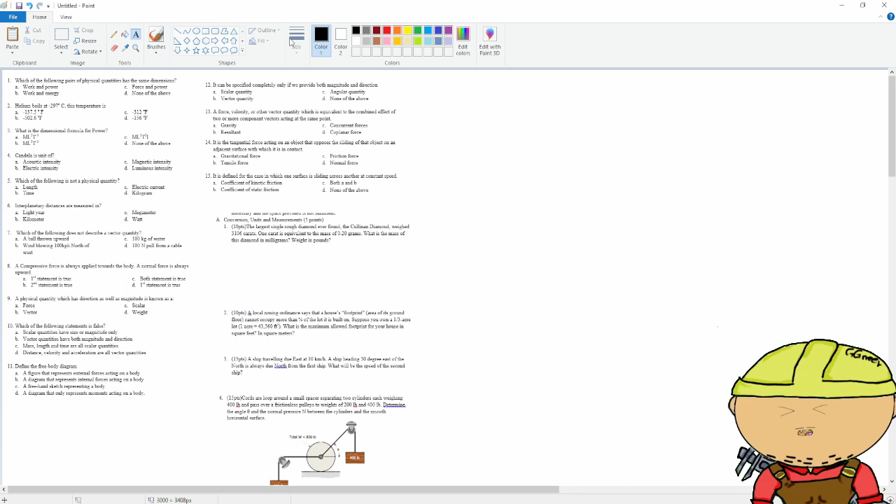For today, we're gonna be doing another more example on our series, our more problem series. Fourth video, third video, you will see on the title. Okay, so how about we get started? Are you guys ready? And let's go.

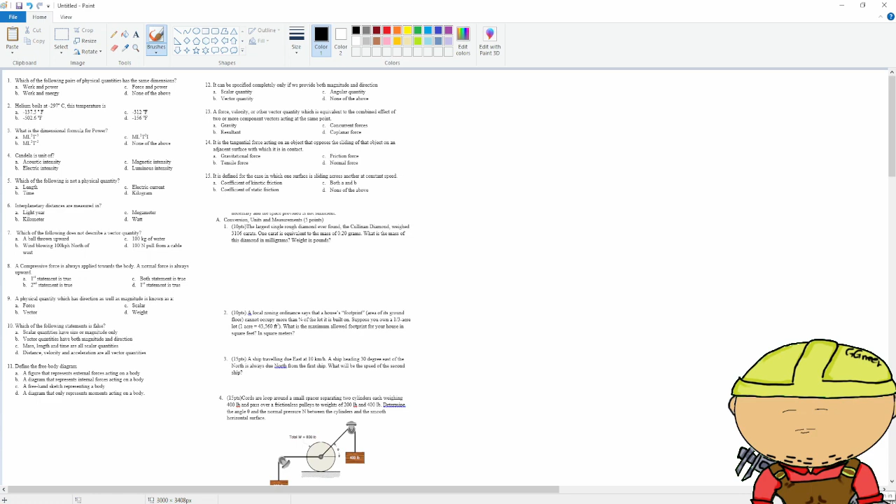Alright, so in our more problem or in this set of examples or questions, we have multiple choice and problem solving. And again, this is about physics, and I think this is measurement, the units and dimension, right? Dimensional analysis, statics, kinetics, kinematics, and work power energy.

Okay, so judging from the choices, which of the following pairs of physical quantities has the same dimension? Work and power? Nope. Work is joules, power is watts. Work and energy, yes. Force and power: force is Newton, power is watts. None of the above. The answer is B.

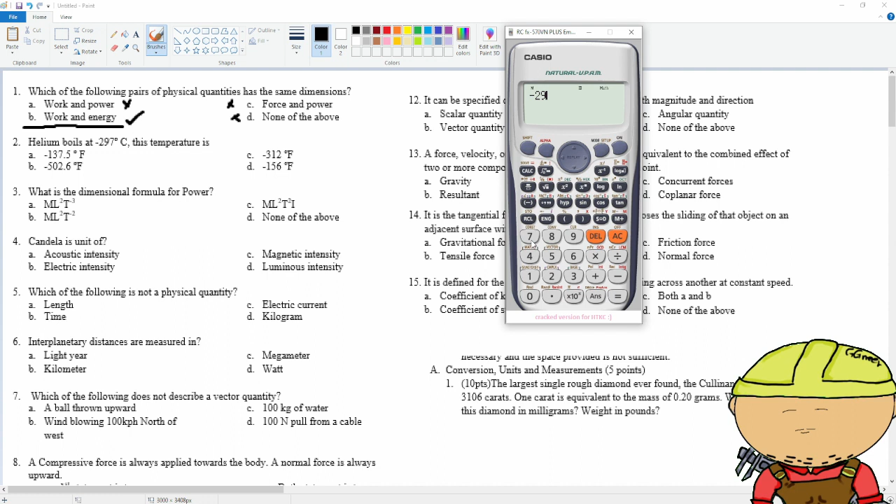Okay. Helium boils at negative 297 degrees temperature. Mathematically, 297 exists. But for context, there's no such thing as below negative 273.15 degrees Celsius because realistically, a material could only achieve negative 273.15 degrees Celsius or absolute zero temperature. Okay? But this is a problem. Let's just convert this into Fahrenheit, sorry. B. The answer is B.

What is the dimensional formula for power? Okay, so dimensional analysis, power is joules per second or time, or work over time. Work is force times length over time. Force is mass length over time squared. Length over time. So that's gonna be ML squared over T cubed. Okay. Where's that? Letter A.

Candela is a unit of luminous intensity. Which of the following is not a physical quantity? Electric current. Physically, you can still feel it. Length, yes, of course. Kilogram, yes. Electric current is a quantity. Kilogram is a unit. Again, time is not physical though. Okay, you cannot accurately measure time. We give measure to time, but it's not physically there. Right? So time.

I think time is not a physical quantity. It could be kilogram. Kilogram is not a quantity but a unit. But I think time is the correct answer.

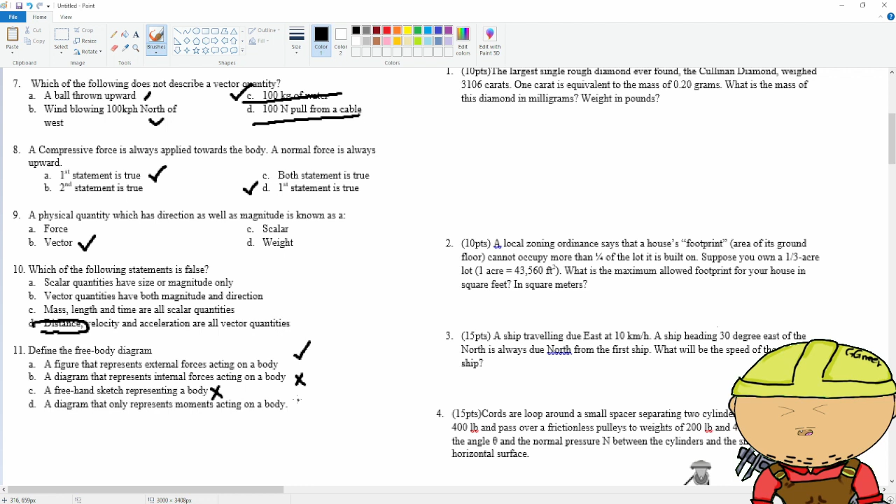Define the free body diagram. A figure that represents external forces acting on a body. Yes. A diagram that represents internal forces. I mean, how can a diagram have internal forces acting on the body? Probably in the body, but not on the body. That's weird, right? A freehand sketch. No, free body, there's no body. A diagram that only represents moments acting on a body. Free body diagram is used for forces, not moments. Okay, so letter A is the answer.

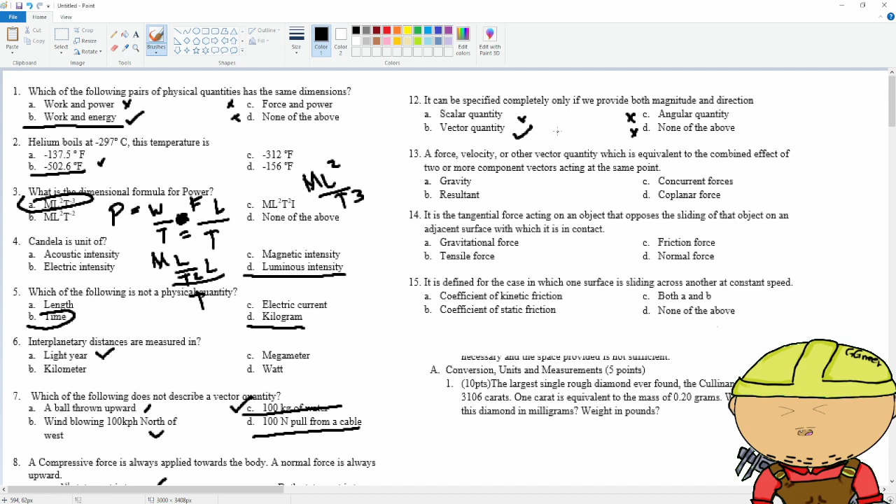A resultant is a force, velocity, or other vector quantity which is equivalent to the combined effects of two or more component vectors acting at the same point. Concurrent forces are forces acting on the same point, concurrently acting together. Coplanar forces are forces acting on the same plane. Resultant means combined result.

Okay, letter B. It is the tangential force acting on an object that opposes the sliding of the object. We know that - that's tangential force, which is friction force.

It is the tangential force acting on an object that opposes the sliding of that object. Friction is the one that opposes the sliding of the object on the adjacent surface with which it is in contact.

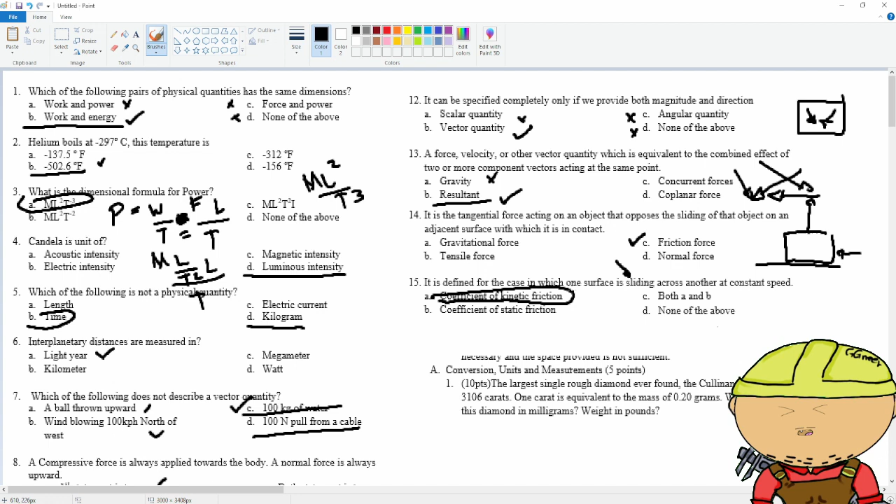By the way, thank you so much for the comments from the last video, and I hope you guys loved it. I've been super busy with work lately, and also my grad school - I'm taking grad school, guys, but you don't know where. It's a secret.

Anyways, the largest single rough diamond ever found is the Cullinan diamond, weighing 3106 carats. 1 carat is equivalent to the mass of 0.20 grams.

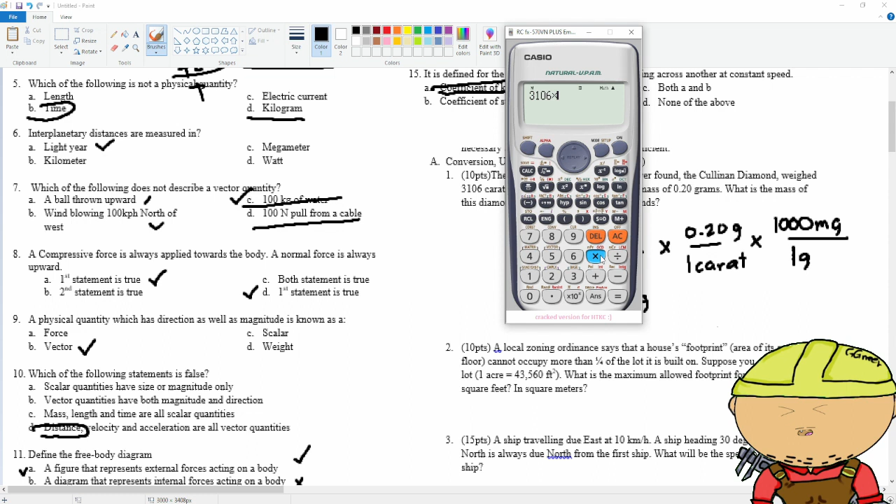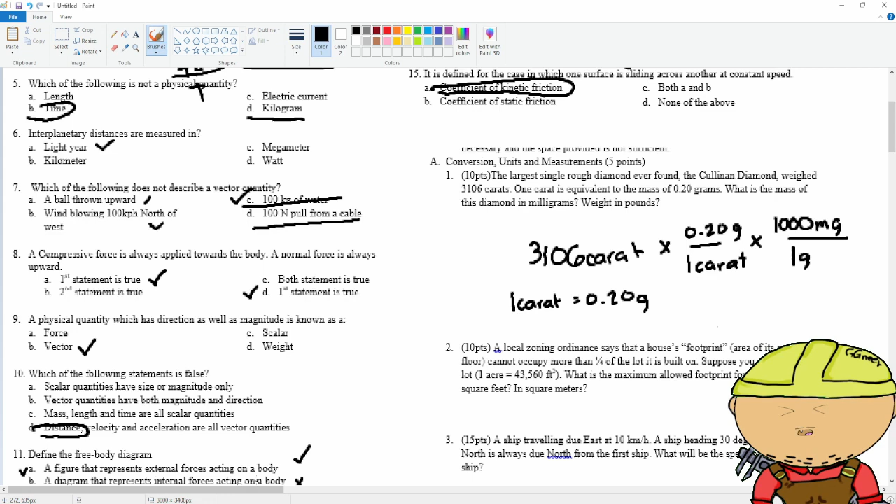What is the mass in milligrams? Set up 0.20 grams at the top, 1 carat at the bottom. We want milligrams, so multiply by 1000 milligrams over 1 gram. That's the solution: 3106 times 0.20 times 1000 equals 621,200 milligrams. That's the final answer.

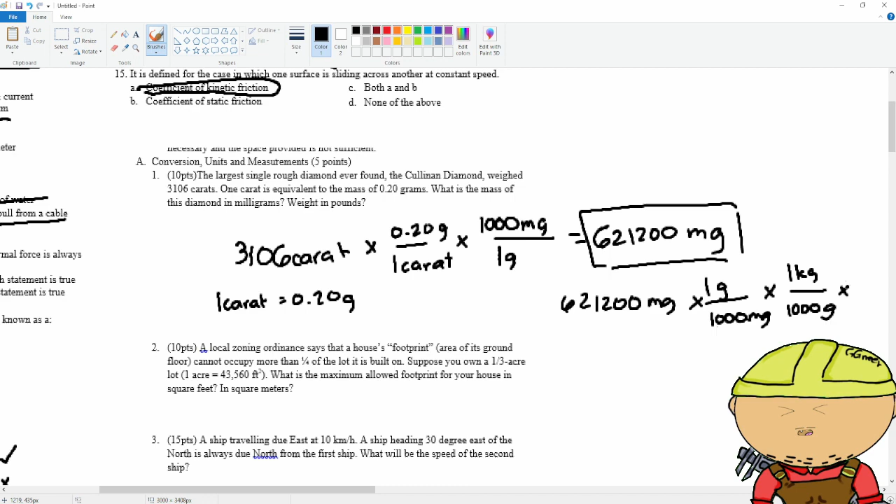No, not yet - we need the weight in pounds. We're going to use the milligram value, 621,200 milligrams, divided by 1000 milligrams per gram, then by 1000 grams per kilogram. We have the conversion on the calculator - remember, kilogram to pound - so 1 kilogram is 2.205 pounds.

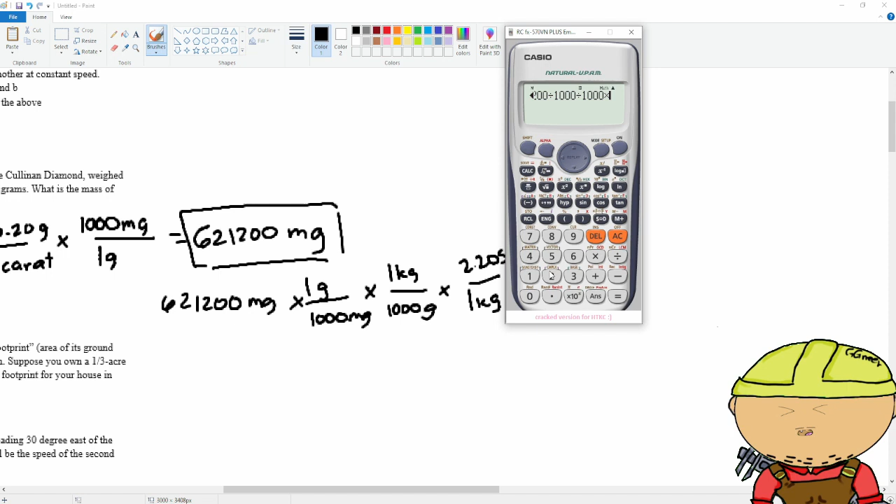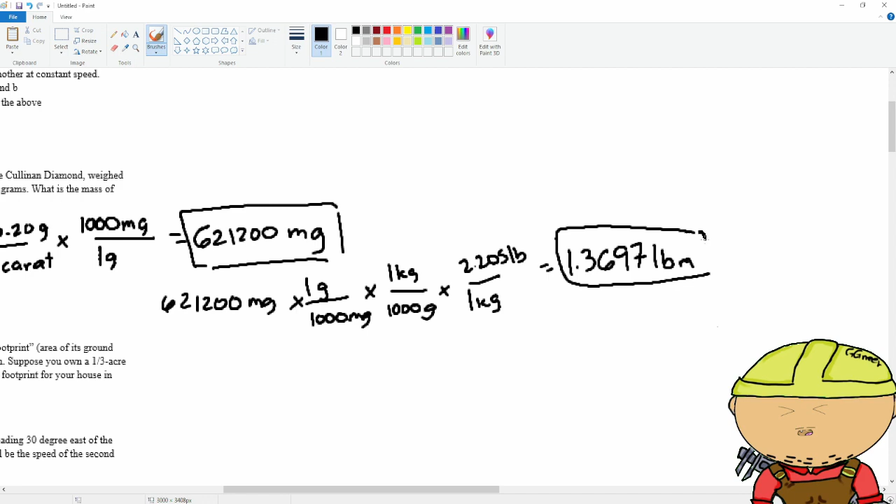What is the answer? 621,200 divided by 1000, divided by 1000, times 2.205 equals 1.3697 pounds mass. Okay, this is the second final answer.

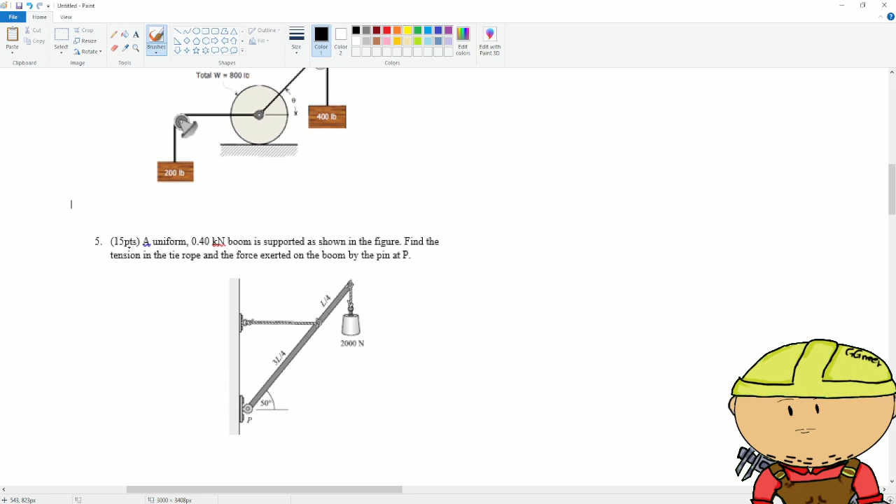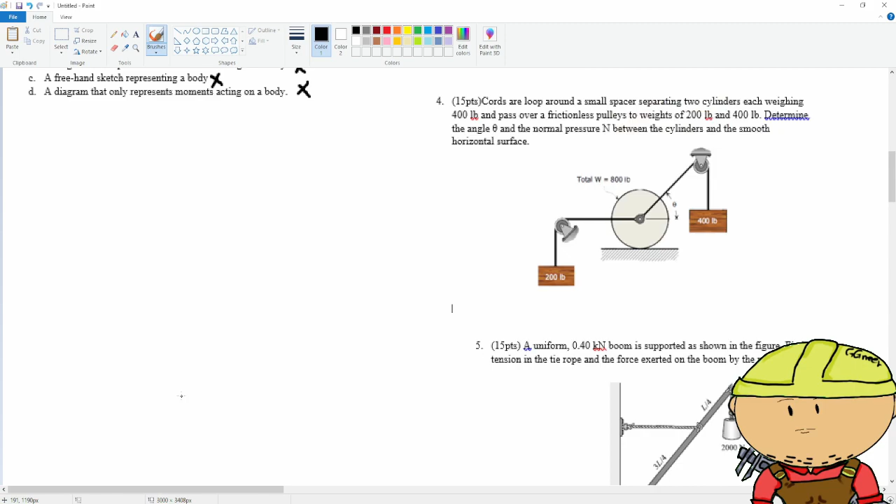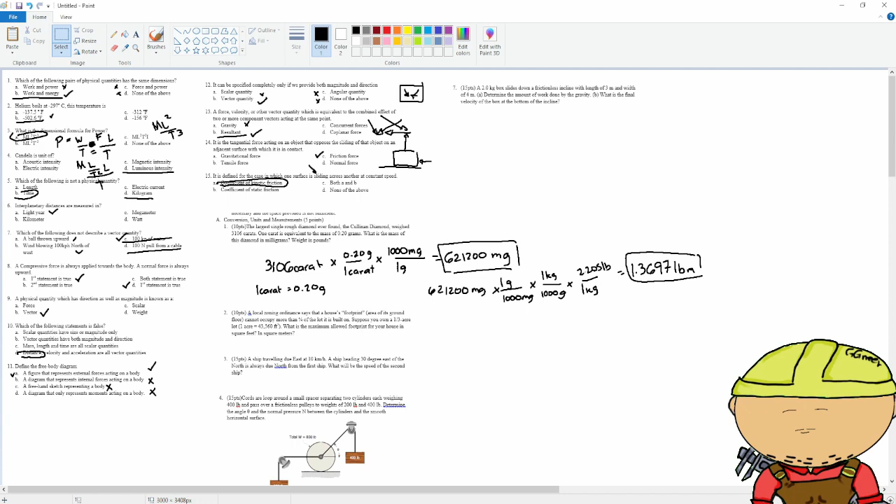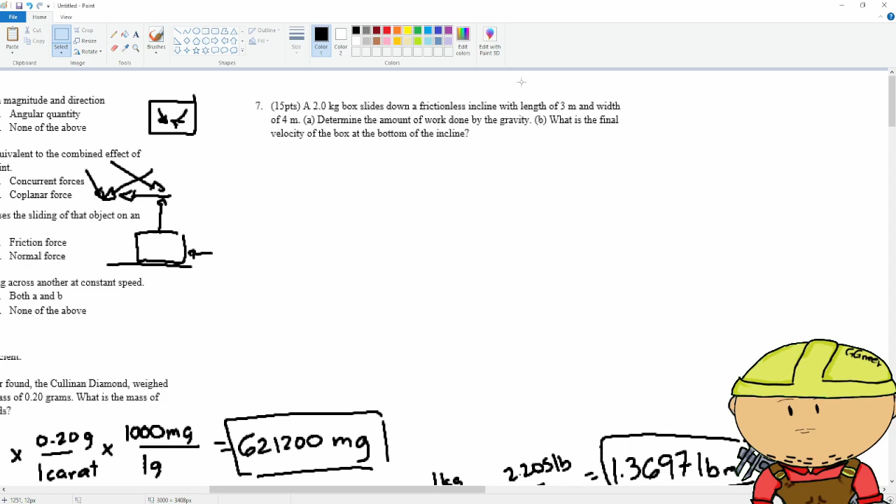I think that's it - is there any problem 7? Hey, there's no problem 7. Wait... hello, welcome back, oh there you go, we have number 7. Okay, so you guys copy that, and we'll answer it later. 5, 4, 3, 2.

Let's go, okay so let's go for number 2. I hope you guys are having a chill time right there - I'm having a chill time too. It's pretty hot, but I'm cool, I'm chill, very chill.

A local zoning ordinance says that a house footprint area of its ground floor cannot occupy more than one fourth of the lot.

Suppose that you own a one-third acre lot, and one fourth of that one-third is the max footprint. So we convert one-third acre to square feet, using the given conversion of 43,560 square feet per acre.

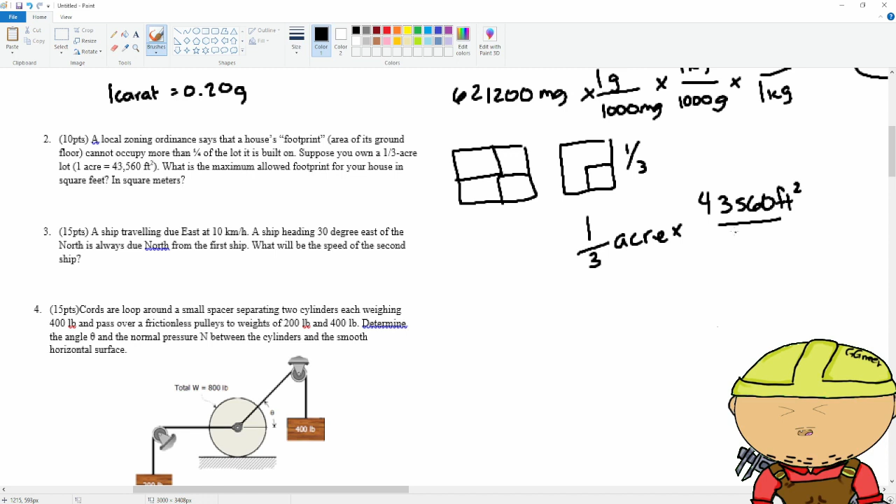Okay, we can only occupy one fourth. So what is that? 43,560 divided by 12. That's 3630 feet square.

Let's convert that to square meters. 1 foot is 0.3048 meters, squared. So it's gonna be 3630 times 0.3048 squared, which is 337.2380 meters squared.

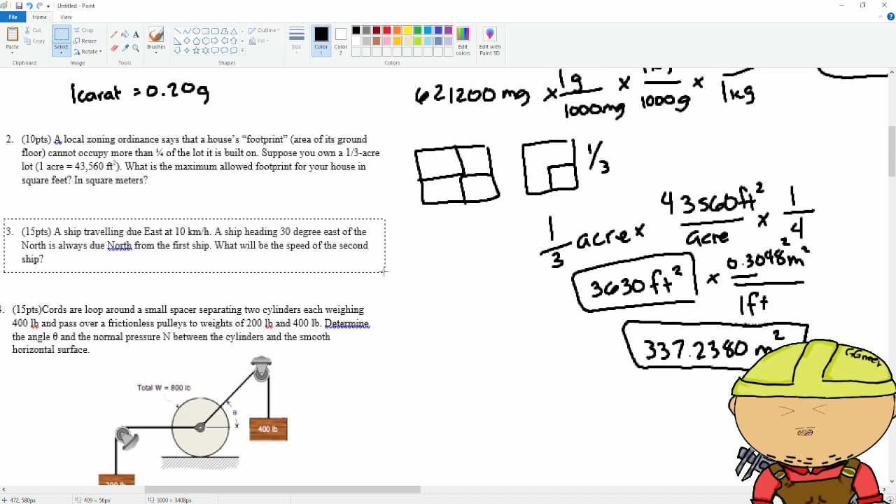I'm sorry. Okay, these problems I think are fairly okay. Yeah, it's okay.

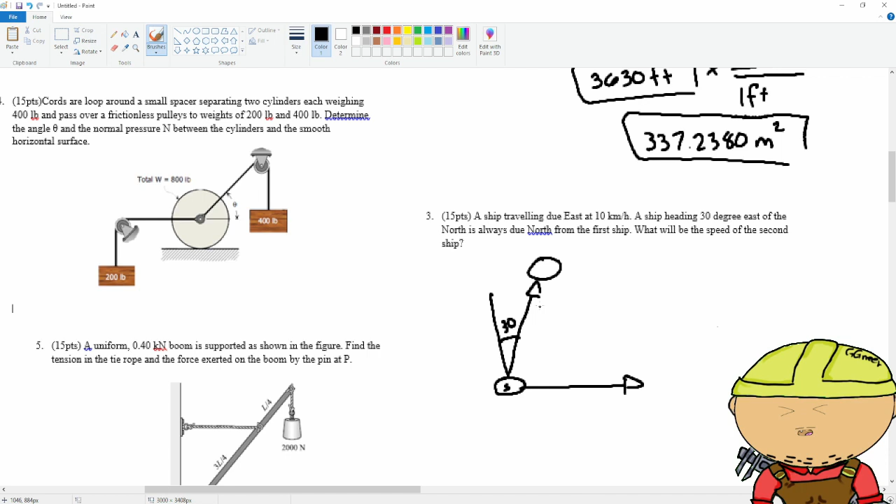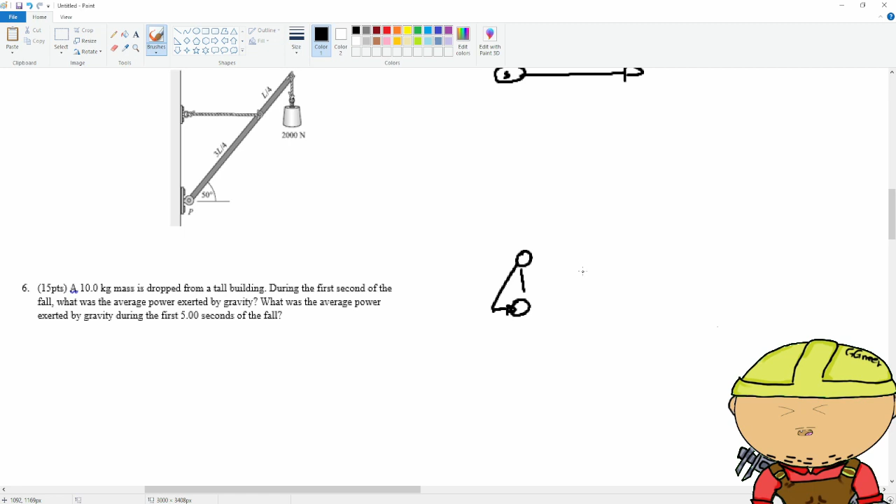A ship traveling due east 10 kilometers per hour. There's a ship heading 30 degrees east of north. The second ship is always due north from the first ship. So let's say there's a ship going here, meaning the other ship is also here, always due north. If the ship is right here, the other ship is right here. If the velocity of the ship is 10 kilometers per hour...

This is 30 degrees. What will be the speed of the second ship? If this is 30, this is 60 by virtue of the triangle method.

Using cosine: cosine 60 is equal to 10 kilometers per hour over V. So V is equal to 10 kilometers per hour divided by cosine 60. Cosine 60 is 1/2, so that's gonna be 20 kilometers per hour.

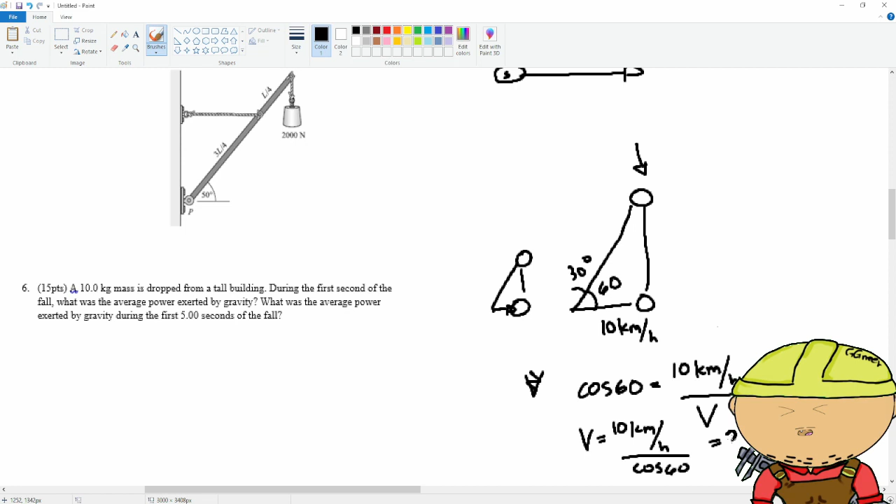Okay, very nice. That's number 3.

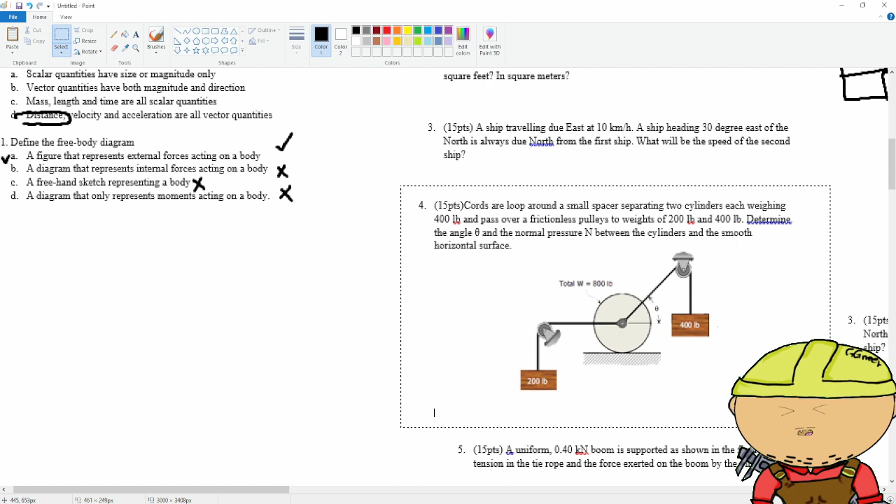Oh, this one seems familiar. We solved this the other day or the other year. I don't know, it's been so long since I uploaded the video. I think it's been years. I miss you guys. No, it's just weeks. Honestly, it's just been weeks.

No, it's been years. So cords are looped around a small spacer separating two cylinders, each weighing 400 pounds. So if there's two cylinders, that's gonna be 800 pounds. Apply FBD: 800, NF, 400, 200, theta.

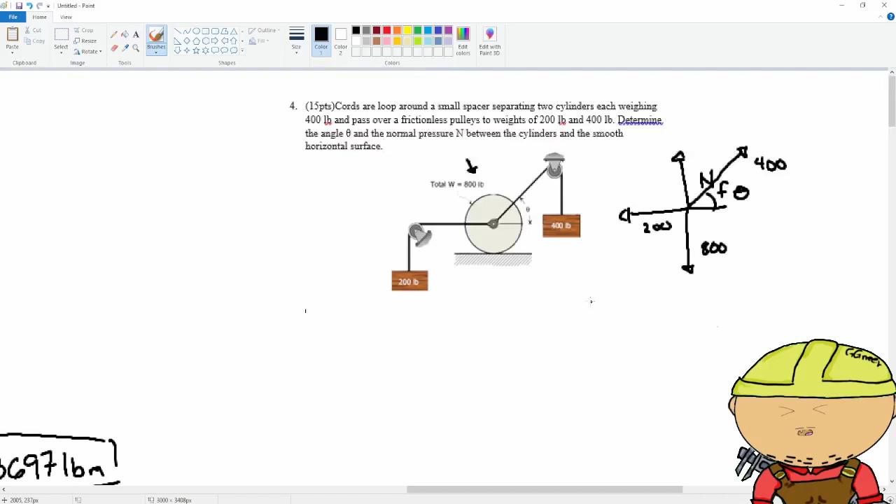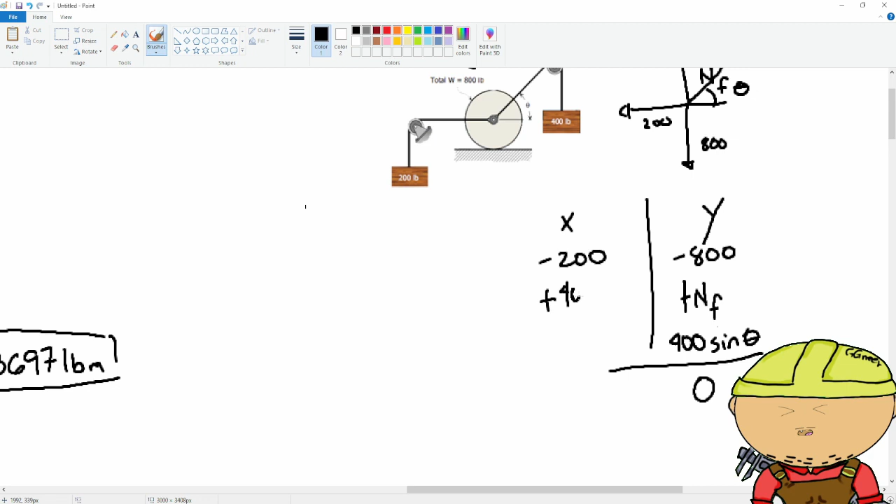Y component: negative 800, positive NF, 400 sine theta equal to 0. This one is negative 200, positive 400 cosine theta equal to 0. So on the x component, 400 cosine theta equals 200, cosine theta equals 200 over 400, that's 1/2. Cosine theta is equal to 1/2, theta is 60 degrees.

For NF, we do the y component. NF is equal to positive 800 minus 400 sine theta, or sine 60. So NF is equal to 800 minus 400 sine 60, which equals 453.5898. What's the unit, pounds or pound force or pound mass?

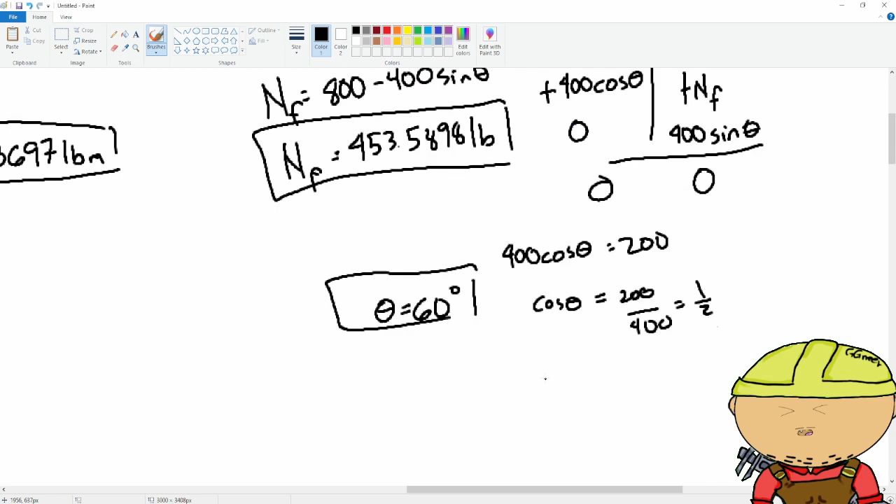But we're just gonna use pounds. Okay, so that is the answer for number 4. Where are we doing this? Do we have FBD? Yes. Do we have FBD for number 3? Yes, we have FBD for number 3 too.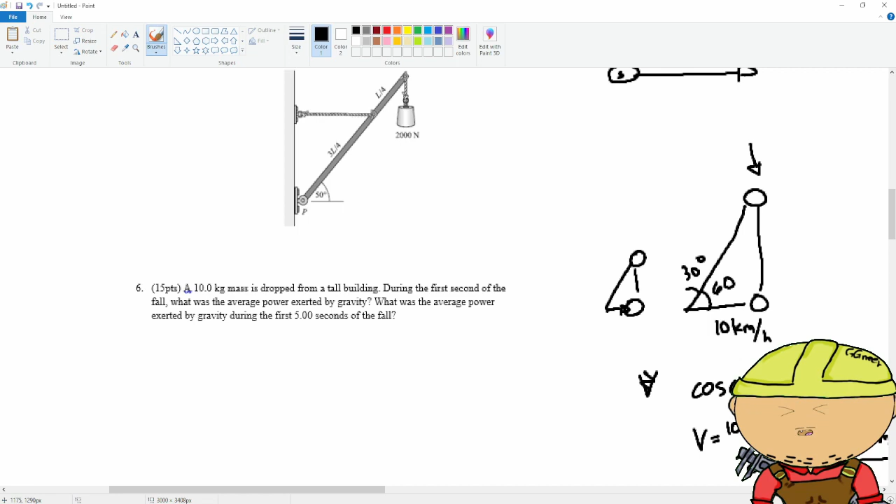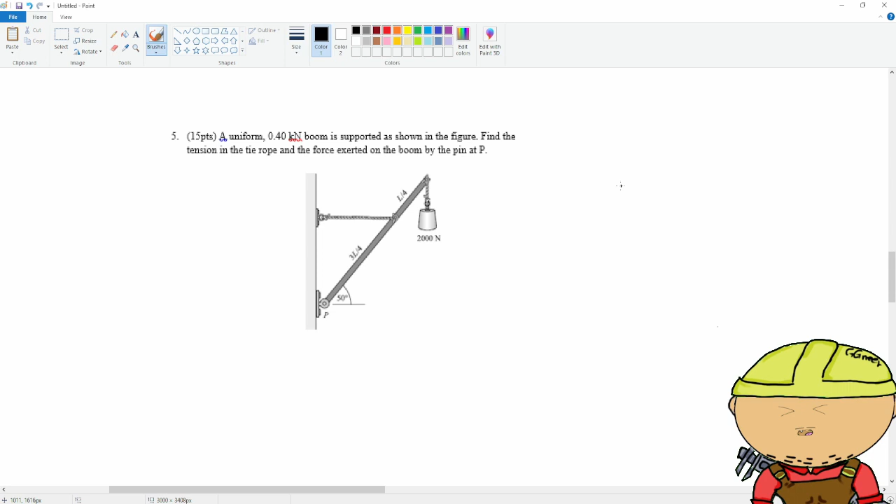There we go, number 5. Number 5, here, coming down. I would say this is the most moderate, or probably hard question here. So first, a uniform 0.40 kilonewton boom.

Let's put the 400 newton, or 0.40 kilonewton, at the center of gravity of the boom, which is supported as shown below in the figure. Find the tension in the tie rope and the exerted pin force at P. So here we have PX, then PY.

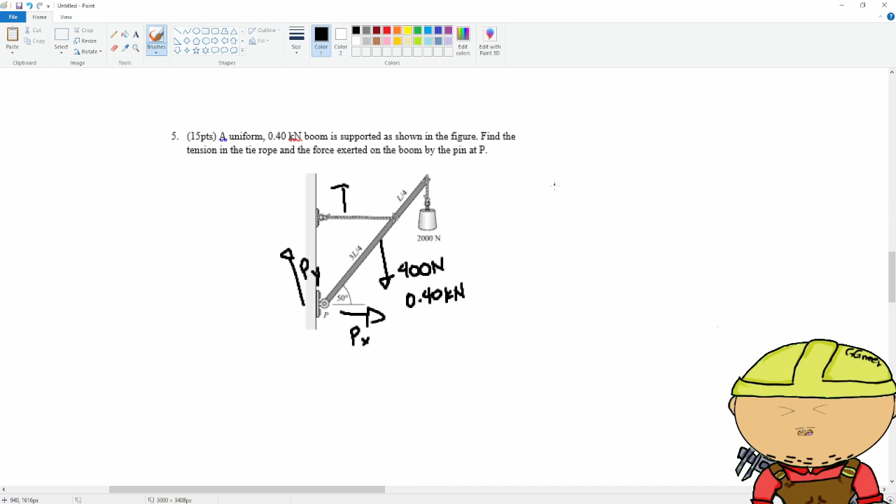So for the FBD, we have PY, we have PX, we have T, we have 400 Newton, we have 2,000 Newton. Initially we see the y component Py is equal to 2,400 Newton, but Px is gonna be equal to T. We don't know the angle of P, it's not 50 degrees.

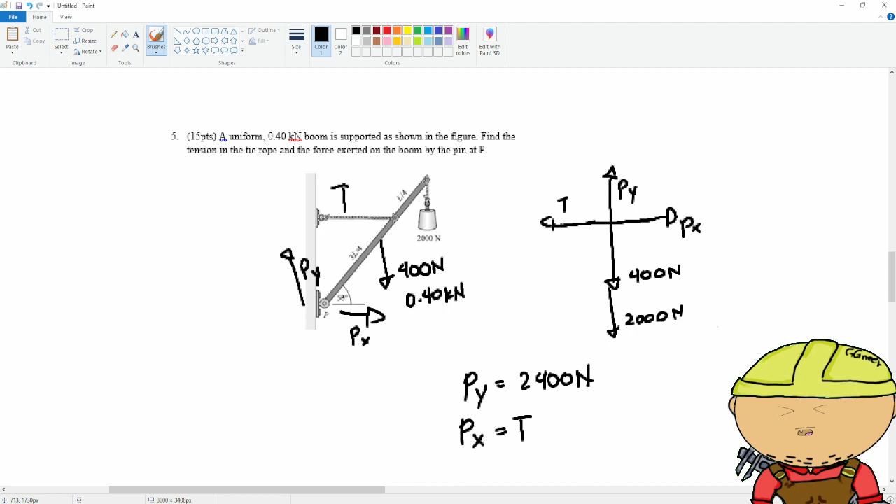Okay, so it could be 50 degrees, but it's not gonna be 50, or we don't know if it's gonna be 50 degrees, so we have to use moment or torque. Moment or torque at P, let's say counterclockwise, using the 400 Newton.

400 Newton is negative because that's clockwise, then distance, if this is P, 3L over 4, the perpendicular distance is gonna be cosine. Wait, it's not 3L over 4 — 400 Newton is located at the middle, so that's gonna be L over 2, and for 2,000 Newton, it's located at the end, so it's gonna be L cosine 50.

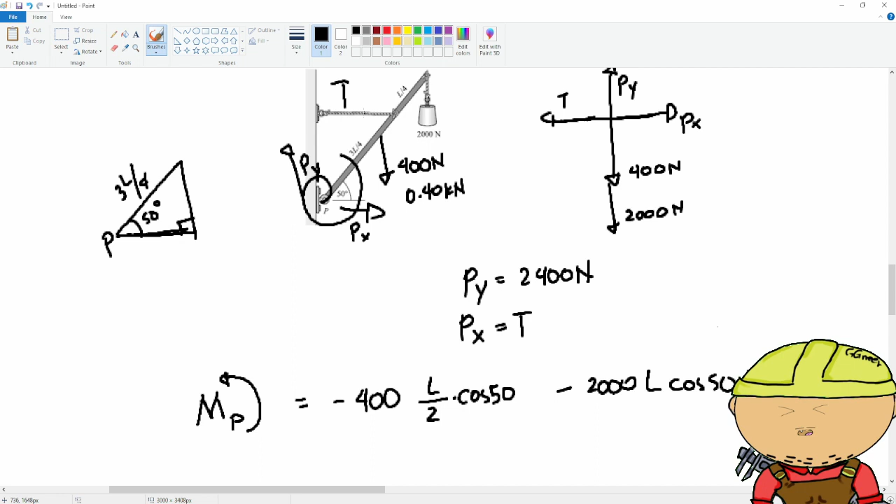While the tension, because we're doing counterclockwise, the tension is gonna be positive, and the tension is 3 over 4, so tension times 3L over 4, cosine 50, sine 50, as the perpendicular distance is the vertical, is gonna be equal to 0 for the system.

Divide all sides by L, so we can cancel the L, since we don't care about the length. So move all the positive terms to the left side: 400 divided by 2, that's 2,200 cosine 50 is equal to T times 3/4 sine 50, so 2,200 times 4 divided by 3, cosine 50 over sine 50, is equal to T.

T equal to Px. What is T and what is Px? 2,200 times 4 divided by 3, times cosine 50 divided by sine 50, equals 2461.

2461.3389 Newton, that's px, and this is t. We're looking for p, which is square root of 2400 squared plus 2461.3389 squared. P is equal to 3437.7593 Newton.

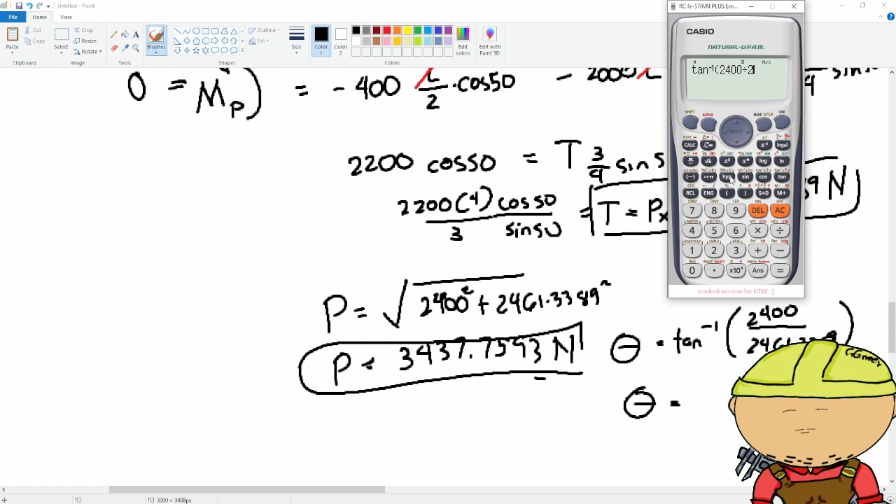What's the angle? Arctangent of 2400 over... y over x, right? I think that's gonna be close to 45 degrees because the numbers are very close. Arctangent... 44.2771 degrees. Very nice, okay, so that's the answer.

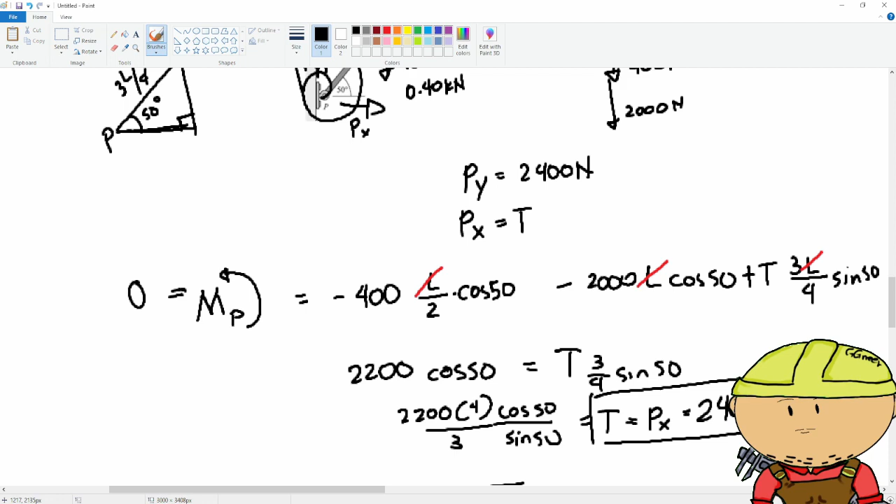I would say this is like moderate. You have to use some moment, but it's very apparent that the moment is at the point, and you have to compute all the forces.

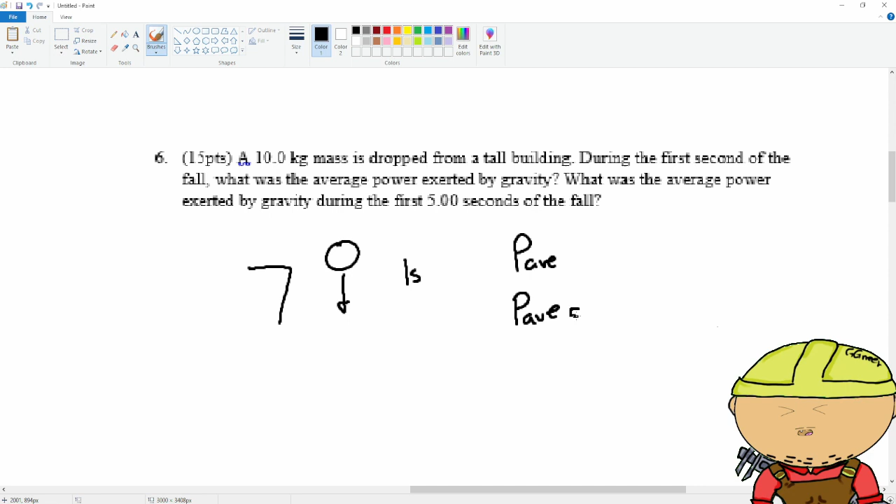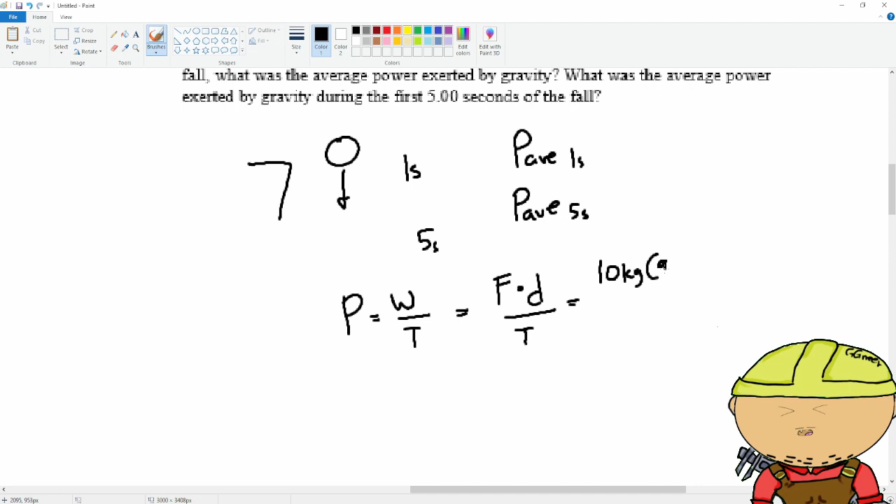Okay, so power is work over time. Work is force times distance, times time over time. We have 10 kilogram times 9.81. We don't have distance times, let's say, 1 second first. Distance, S, is equal to V1T plus one half AT squared. We don't have velocity because it is dropped. So S is equal to one half times 9.81 times 1 squared. So power is equal to mass times gravity squared times time over 2.

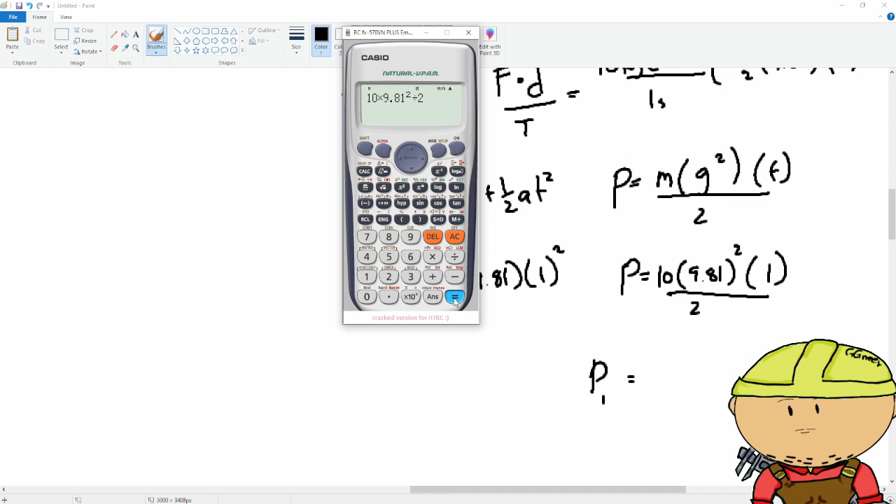So what's that? 10 times 9.81 squared times 1 over 2. Power for 1 second is... times 9.81 squared divided by 2... 481.1805 watts, or joules per second.

How about 5 seconds? Power is equal to 10 times 9.81 squared times 5 over 2... 2405.9025 watts. Okay, so that's the power for 5 seconds.

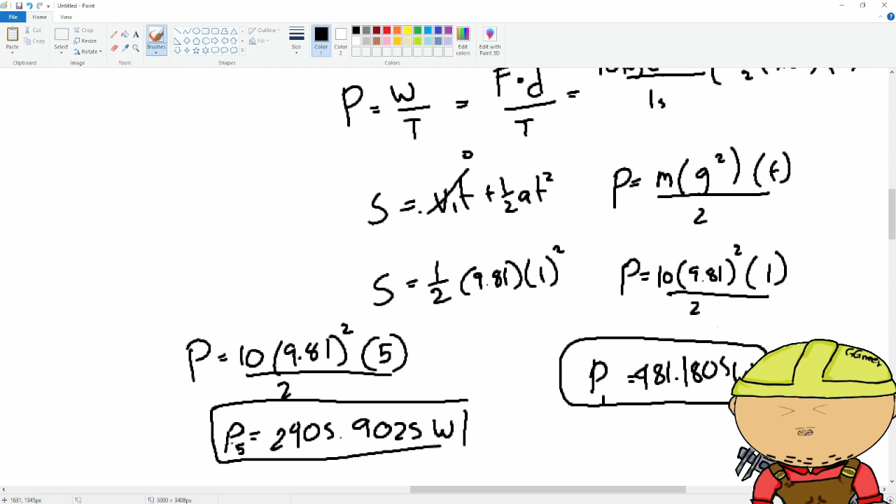A 2 kilogram box slides down a frictionless inclined plane, with length of 3 meters and width of 4 meters. Length cannot be the hypotenuse, width can be here. The hypotenuse cannot be shorter than the base, so this is 3/4. Okay, 2 kilogram box, now this is work, right?

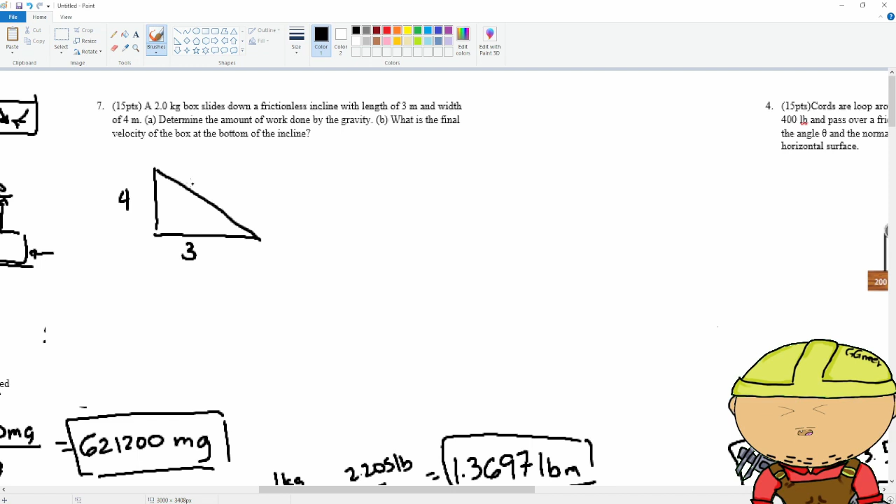So work is equal to force times distance. Let's just tilt this. 2 kilogram, distance, let's just get the force or the acceleration, because force is mass times acceleration. We have acceleration due to gravity, which is 9.81 meter per second squared. But we need to get this angle.

So we could just use arctangent of 3/4. Theta is arctangent 3/4, which is 36.8699. Then that's gonna be the angle.

So we could just do work is equal to 2 kilogram times 9.81 times cosine theta. That's the formula for work. Remember, cosine 36.8699 times 5 meters, or the hypotenuse, the distance is square root of 16 plus 9, which is 25. Work is equal to 2 times 9.81 times cosine 36.8699 times 5, which is 78.48 joules.

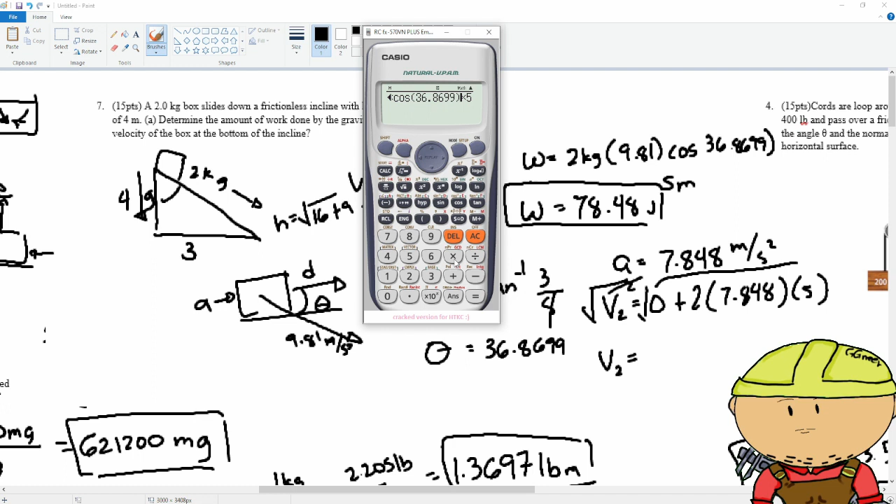2 times 7.848 times 5 is... 8.8589 meters per second, using 2AS. V2 squared is equal to V1 squared, which is 0, plus 2AS, or 2 times acceleration due to gravity, times 9.81 times cosine 36.8699, giving 8.8589 meters per second. That is the answer for velocity.